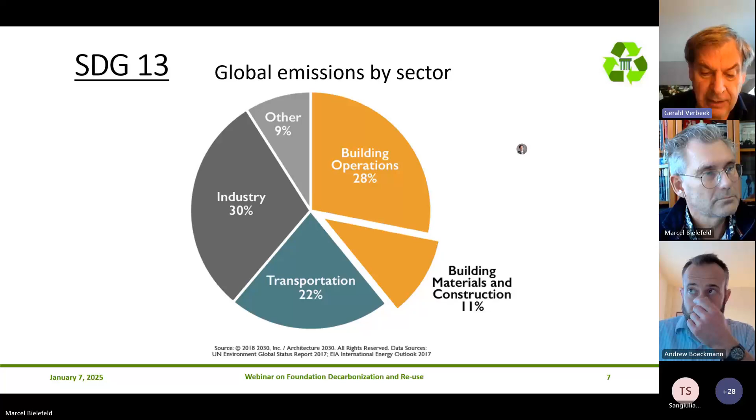When you look at the total global emissions, you see that something like 40% comes out of construction-related aspects. About 10%, a quarter of that, is because of building materials and the construction activity itself, and then an additional about 30% from the operations of the buildings. But what we're putting up is substantial. And more important, when you look at building materials and construction, just three materials—concrete, steel, and aluminum—are responsible for a tremendous amount of global emissions.

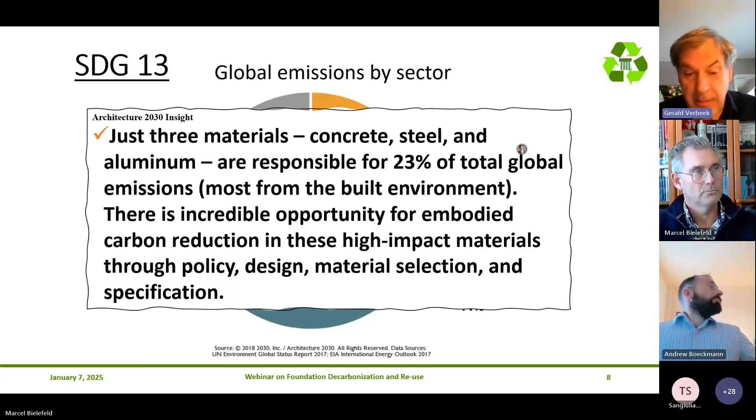Now, we're not using all the steel and all the aluminum for construction-related activities, but those three materials result in about a quarter of the total global emissions, most of them, especially with concrete and steel, from the construction element, the buildings. That means that if we can reduce the amount of steel and concrete that we stick in the ground, we can have a major impact on global emissions.

And that's why you then start looking at the embodied carbon reduction strategy. Many of you will have seen this pyramid before. You can build nothing—obviously, if you don't build anything, there will not be any carbon emissions. At the same time, we have to build something, because population is growing.

We're doing new things, we have to build something, so that first option is really not all that realistic. We do have to minimize waste, as you see at the bottom. If we do that, it's sound practice, but the savings are really not all that much.

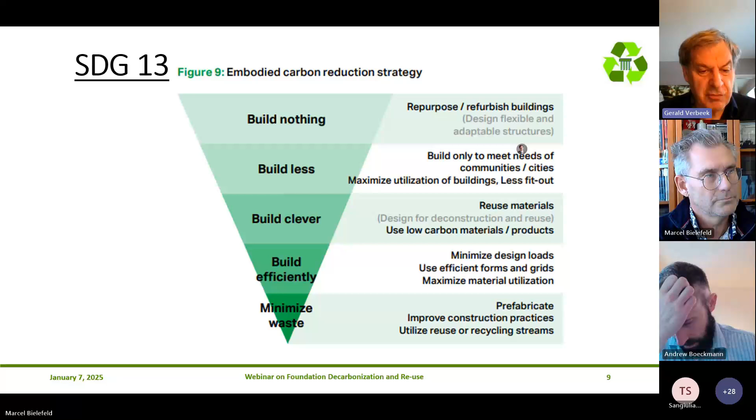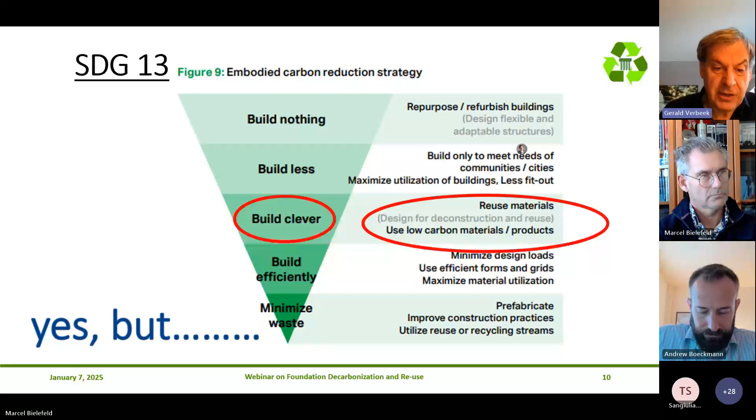Therefore, what we need to do is build clever. And it includes, as you see on the right-hand side of this pyramid, that we have to start reusing materials. Reusing materials means you can recycle it and reuse it again. But more importantly, there's another option: reuse of a foundation. If you have an existing building or structure, a bridge or aqueduct, that no longer fits the requirements, the superstructure can be removed, but you still have that asset in the ground, and that asset is worth something.

Now the problem is that the stakeholders have to be aligned in that way, and the owner would like to hear the opinion of the different stakeholders. The geotechnical engineer, for him or her, reuse of foundation may not be all that interesting because they don't know what kind of material is in the ground, or the condition of the foundation. They have not designed the foundation, and yet they have to assume the risk that the existing foundation can meet the new requirements. So the geotechnical engineer is not all that happy about it.

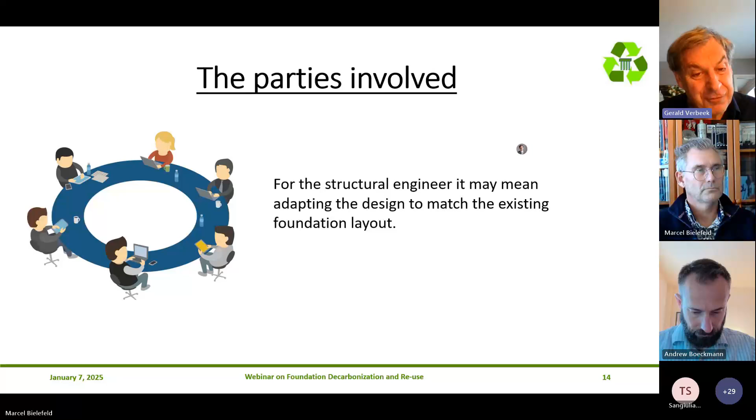Similarly, the structural engineer, because if you have an existing foundation, it means you have to design the new superstructure to match that existing foundation layout. Yes, you can supplement that existing foundation, but it still has an impact on your new superstructure. And therefore it limits the options that the structural engineer has.

Same thing with an architect. Suddenly, all his visions on how to design a building, how a building should look, are no longer all there, because you have to fit that layout of that existing foundation. And it means they're not necessarily all that enthusiastic about it.

And that basically means the owner has to deal with a couple of things. First of all, you have to put in an additional investment to analyze the existing foundation. That's an investment up front. There may be a tremendous payoff at the end. But you also have to deal with a project team that is not all that wild about a decision to use that existing foundation. And for the regulatory body that has to approve this new structure, there's another problem.

Andy will, if not in his presentation then during the Q&A, talk a little bit about it—that there haven't been that many examples yet, so the regulatory body cannot lean on existing guidelines, regulations, or other case studies to say, yeah, let's do this. So once again, you have some reluctance to go ahead with it.

And that's the same thing with the insurance company. The insurance company has to cover a superstructure on an existing foundation, something that hasn't been done all that often. What is the consequence? Is the risk higher? And therefore, in the end, when they vote on this proposal, you're going to get all negative votes. And the consequence is that by voting negative, we leave that asset in the ground.

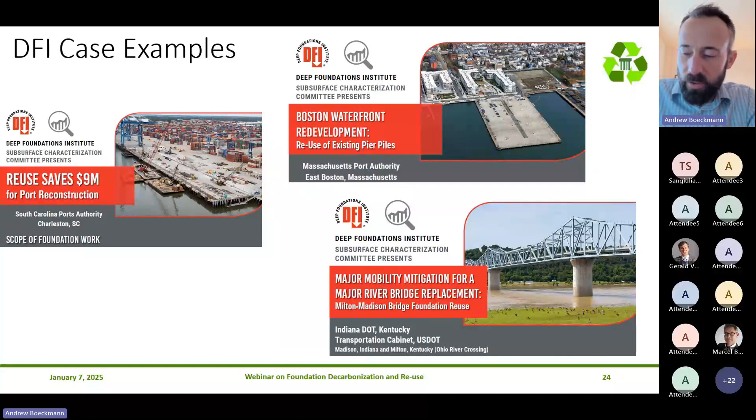I mentioned outreach. This is some of the case examples published on the DFI website that I linked to. We've got 6 of these published so far, and we're still working on more. These are 2-page documents that give high-level project summaries and highlight some of the real tangible advantages of reusing foundations in terms of cost and schedule savings, which can be, especially for these big examples shown here, really significant cost and time savings associated with reuse.

The survey I alluded to was part of the Transportation Research Board's - one prong of that organization in the States is the NCHRP, the National Cooperative Highway Research Program. They do these syntheses every year where they pick, I think it's gone up from 20, a pretty good number of topics to study spanning anything related to transportation, so foundations get represented in that, if not every year, every few years. And one topic that came up back in 2015 was foundation reuse.

That was selected for study. So this is actually how I first got involved in reuse - by performing that synthesis, where we surveyed all 50 transportation agencies, and I think we talked to the Canadian ministries as well. So I'm going to show some highlight results.

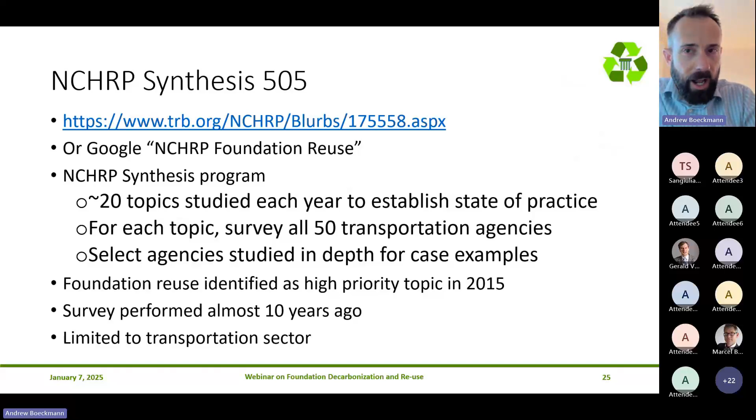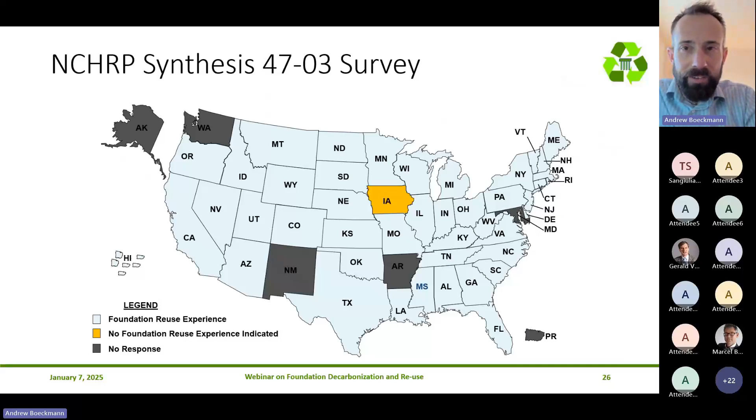Of the 50 states, we had a really good response rate. I think all but 5 or so agencies responded, and all of the ones that responded, with the exception of Iowa, had experience with foundation reuse. I think Iowa probably does have experience now, if they didn't then. So it's very widespread for agencies to reuse foundations, but the experience varied widely, both in terms of the applications for reuse and how commonly they were doing it.

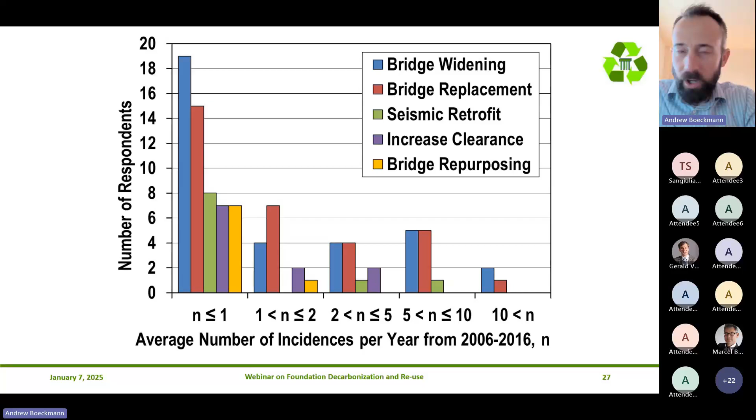So those were the agencies that we tried to gather more information from. We selected them as case example agencies that we talked to more, spent some more time interviewing and really diving into their reuse practices.

Some of the interesting findings from the case examples: one of the agencies, Massachusetts, has a big proportion of their infrastructure in urban areas, so they deal with ground congestion a lot. It's also a relatively old state, so the ground has been developed several times. A lot of the great experience in foundation reuse also comes out of London, where they're on many cycles of reusing the same spaces. So ground congestion tends to be one of the real drivers for foundation reuse.

Similarly, environmental constraints, a lot of the NEPA stuff, can really force the hand toward reuse. So in addition to cost and schedule benefits, honestly, a lot of the time that we're reusing foundations, it's because we really don't have any other choice. That's fine, that goes more to the feasibility thing.

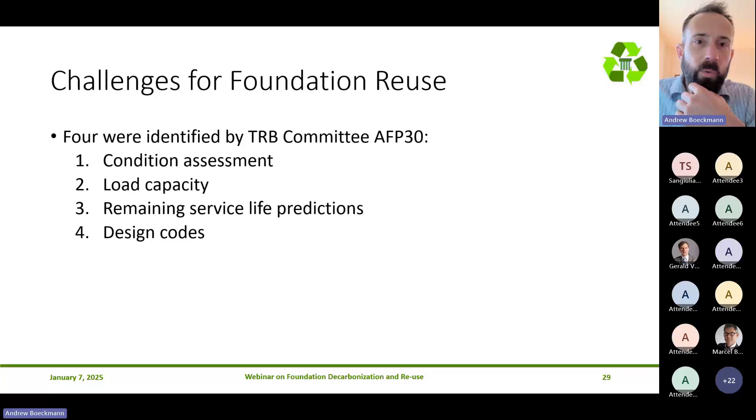But we've also got to think about condition assessment. Load capacity maybe isn't super different from a new foundation, but condition assessment is kind of the new thing - what kind of shape is the foundation in? And hand in hand with that is how much more service life can we get out of the foundation. The design codes can be kind of tricky if it was designed for loading and using methods that aren't used anymore. How do we translate that to more modern design codes?

We've also got Gerald's nice run-through of the different players, which gets into the risk component. As Gerald mentioned, foundation reuse is kind of perceived as more risky than new foundations, and I agree with Gerald, that's not necessarily correct. Maybe it's more risky in some circumstances, but in a lot of circumstances it's probably less risky.

I think what's really true is that the risk is different. With a new foundation, there's a lot of risk that it won't be installed properly, whereas with an existing foundation maybe there are risks associated with condition, although I think in a lot of cases those risks are overstated. The other thing that's really different is the allocation of risk.

We've got kind of a system, at least in the States, for how we allocate risk of foundations. When we start talking about reusing foundations, I think that can upset the apple cart in terms of how risks get allocated among the different players that Gerald went through.

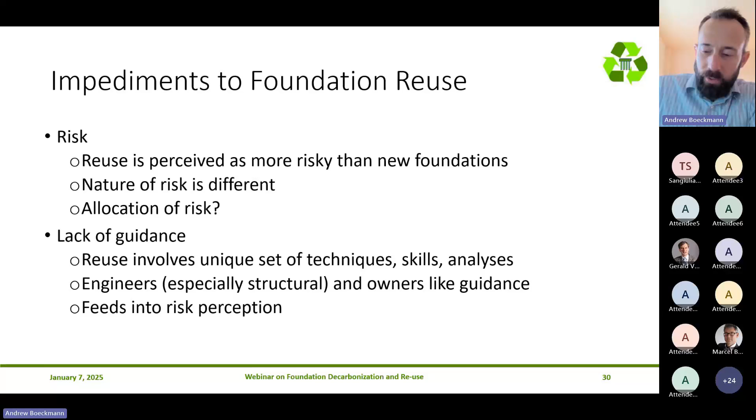And then there's the lack of guidance, which our DFI committee is attempting to resolve. That tends to be a big impediment. It just doesn't give many, especially structural engineers and a lot of geotechs too, the guidance documents we like to follow, for obvious reasons. Not just because it gives us standardization, but it also makes people feel better. So that feeds into that perception of risk.

So, like I mentioned, most of these agencies do not have any kind of formal policy. A handful did, but once you dive into the policies that exist, they're not the kind of big guidance documents that people are really looking for - and this isn't meant to be critical.

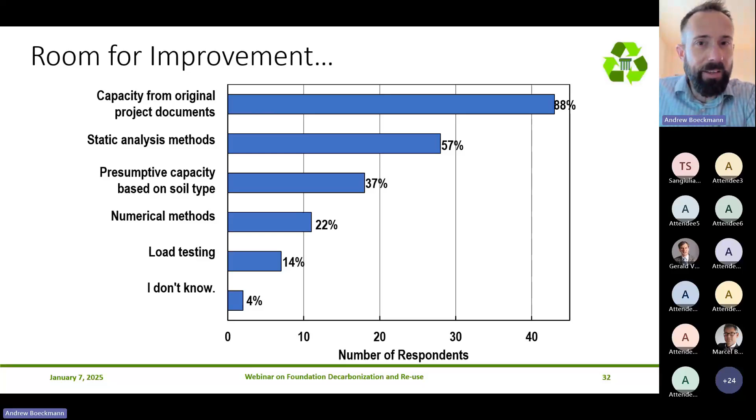There's also room for improvement in how we're actually approaching reuse technically. By far the most common technique for assessing capacity of the existing foundation was just to use the capacity from original project documents, which tends to be very conservative, as I'll show from a few brief slides here on some research that we did for the Missouri DOT.

This came a few years after the survey project. For this MoDOT research project, we did a really comprehensive field study of a couple of bridges that had been in service for 60, 70 years.

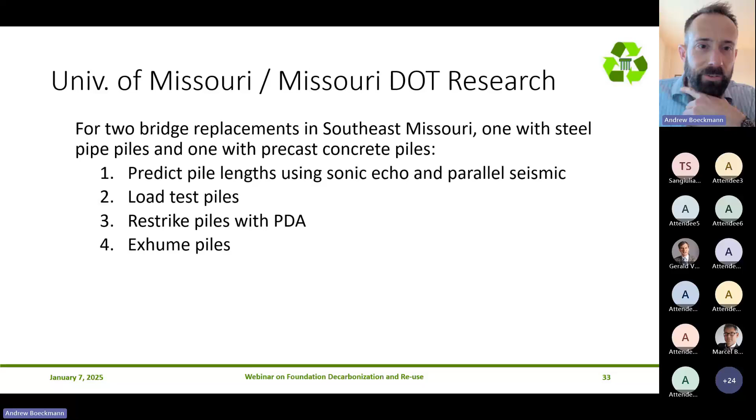Did geophysical methods. We actually did static load tests of the existing piles using the bridge as a reaction. We restruck the piles and did dynamic analysis, high strain dynamic. And then we exhumed the piles and got to look at them.

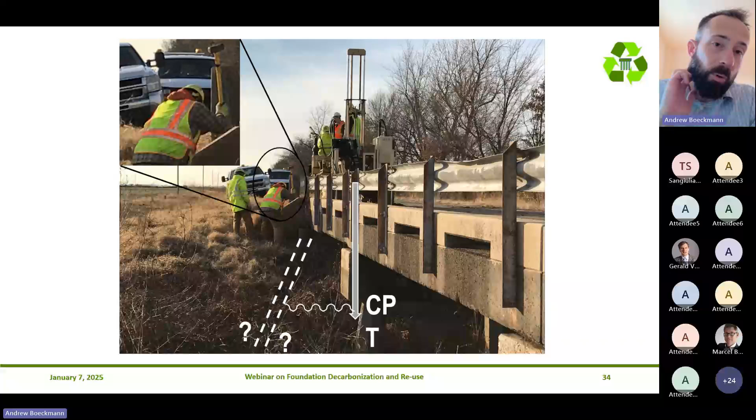Here's the parallel seismic test. I won't get into the details, but a really effective way to characterize the length of an existing foundation is this parallel seismic approach, which can be done with either a boring or a CPT rig, like we did here.

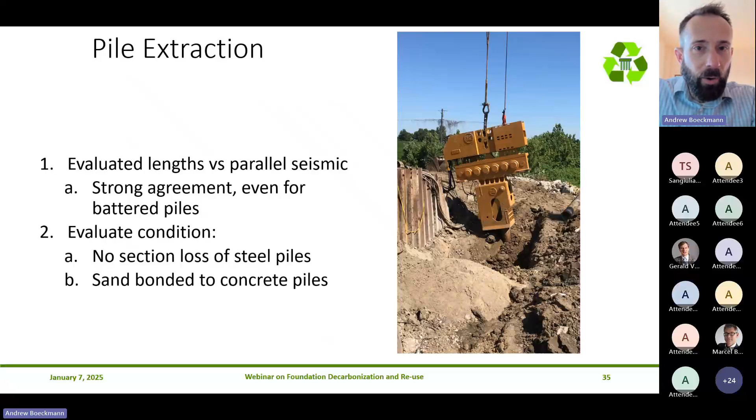We extracted the piles with the vibratory extractor there. Found that the piles were in great shape. Also confirmed the parallel seismic results.

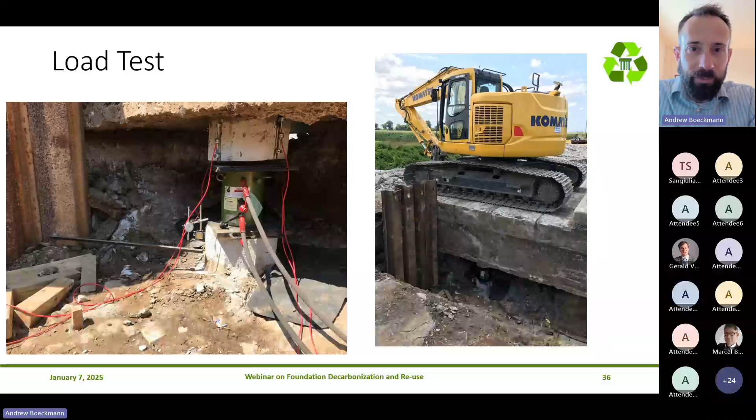Did these static load tests. We had the equipment parked on the top of the bridge to get us as much reaction force as we could get. And even with all that reaction force, we still couldn't fail at least one of the piles. The other one, I think we were getting there.

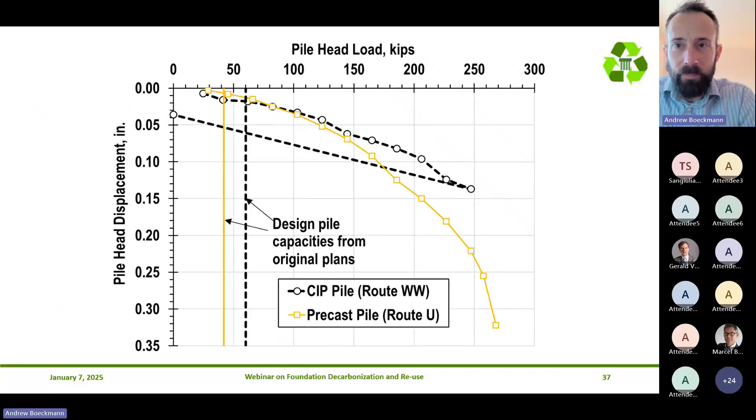We're going to do the same kind of research for the Indiana DOT. I won't get into the details, but basically going to try to repeat that and do some reliability studies.

So real quick summary here. Frequency of reuse is difficult to track, but I think it's probably more common than we think. We're trying to resolve that.

With our case examples for the DFI, where we can highlight some of these examples. But I think there's a lot of good ones, especially out there in the private sector, that we don't even know about. It is a topic that's getting more attention thanks to the efforts of Gerald, especially.

Risk perception is a big impediment, and our DFI committee is working on developing guidance. So I'm gonna say the future is bright, and I think we're ready to hand it over to Tony.

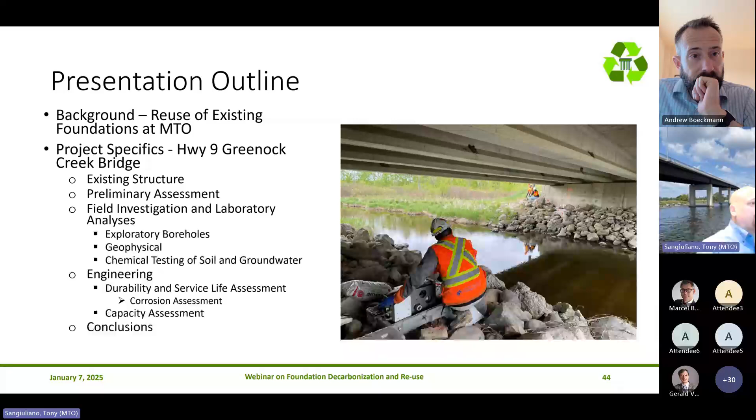I'm a firm believer that if you stick to a process, the outcome will take care of itself. But I'm going to give you just a little bit of background in terms of our inventory, our infrastructure. That's what the next slide is all about.

We have over 3,000 bridges, over 17,000 kilometers of highways, about 5,000 plus or minus structural culverts, defined as culverts with spans greater than 3 meters. We've got a total asset value of about 100 billion, and we transport about $3 billion of goods and services on our highway system daily. So a little bit of background in terms of the Ministry of Transportation of Ontario.

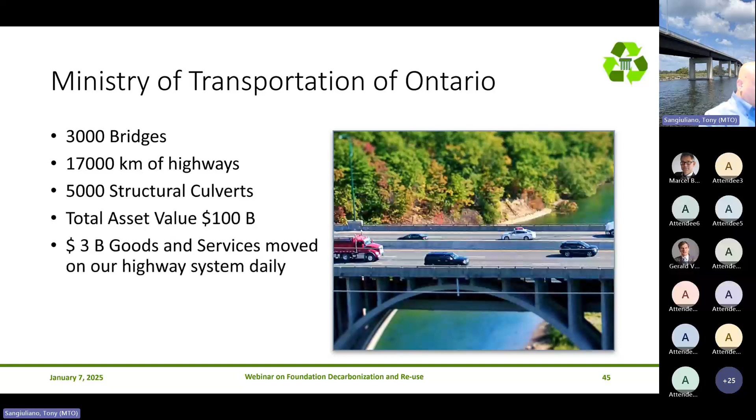When it comes to the reuse of existing foundations, before I share the content of this slide, I'm a big sports enthusiast. That includes hockey, baseball, and football. Starting with football, one of my role models was Vince Lombardi.

And he had several quotes. But one of his quotes was, winning isn't everything, wanting to win is everything. And what that simply means is, in order for any initiative to succeed, there has to be a will.

I'm very proud that I've been able to encourage senior management at the Ministry of Transportation to make an investment in this initiative, and I think we're well on our way. This case study is one example. The other...

And we are certainly committed at the MTO because of the several tangible benefits, whether it's traffic mobility, cost savings, or favorable schedule impacts. There's a lot of benefits, of course, to the reuse of existing foundations, but there needs to be commitment.

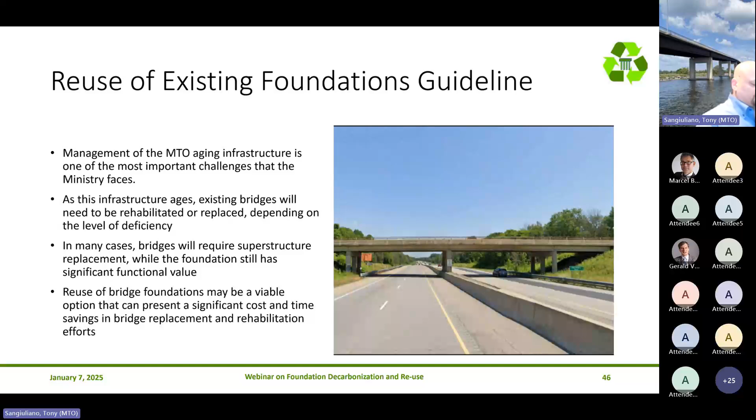And of course, we've got this one case study and more. So I talked about the process. What we are doing is, on every project moving forward where we are considering replacement or rehabilitation, one of the things that we specify is in our terms of reference.

So in commissioning a service provider, a prime service provider, and of course all the functional specialties, including foundations, we actually include requirements in our terms of reference. So it's not like we're leaving this to chance.

We're going to invest in investigation and engineering, make a preliminary assessment, undertake a risk analysis, as indicated on the slide, do an LCC, and of course get into the details if, in fact, when we go through the preliminary assessment, it becomes a winner in terms of, yeah, you know what, the reuse is the preferred option. And then we get into the detailed assessment.

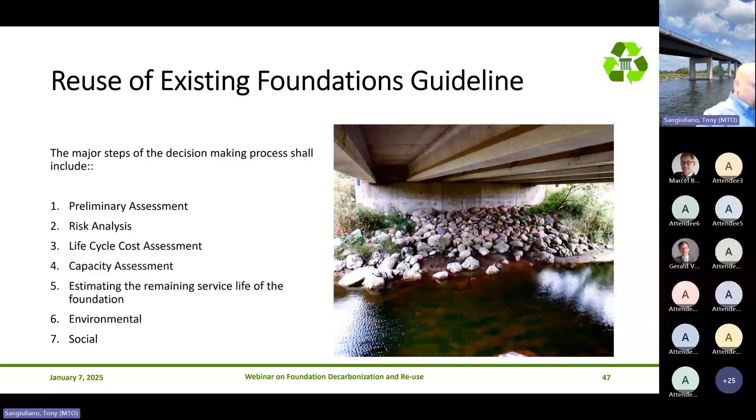But the point that I want to make is that, again, I always say that destiny is not a matter of chance, it's a matter of choice. So we explicitly specify requirements.

The project I'm going to share with you this morning involves an existing bridge structure built in 1971, 18 meters long, single span, carrying Highway 9 over the Greenock Creek, with approach embankments in the order of 3 to 4 meters.

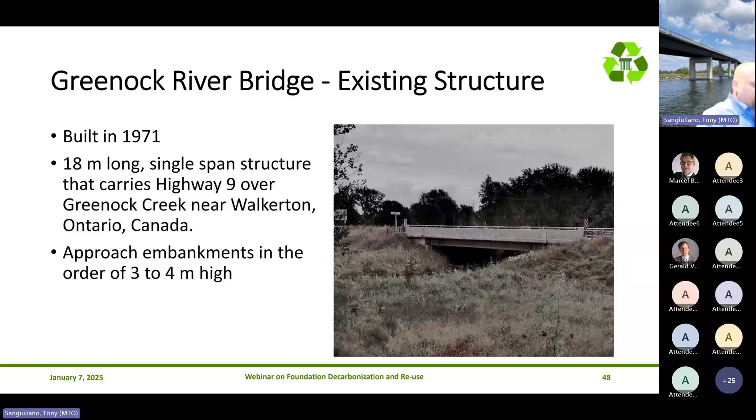There are challenges at times, and we're trying to remedy that with new requirements for new projects: when we install new foundations, to look at any historical drawings or as-built drawings. We did that here, and you'll see that the existing foundations at the two abutments are comprised of 22 steel H piles, HP 310 by 79, approximately 8 meters long, driven into a glacial till deposit. I'll show you the stratigraphy shortly.

We did a little digging into the design loads and were able to ascertain that the piles were designed to support 630 kilonewtons per pile, or 70 tons per pile.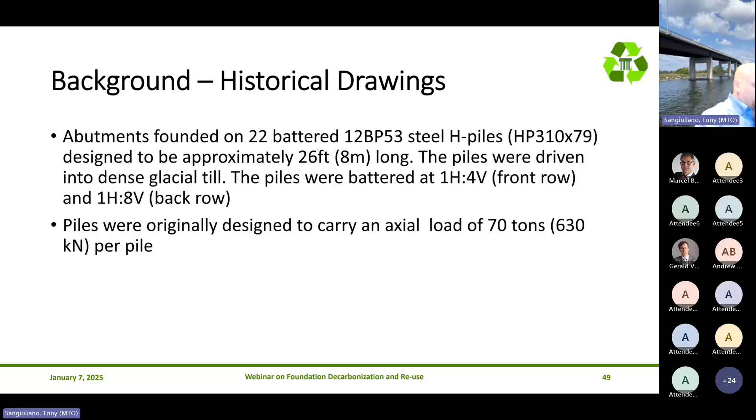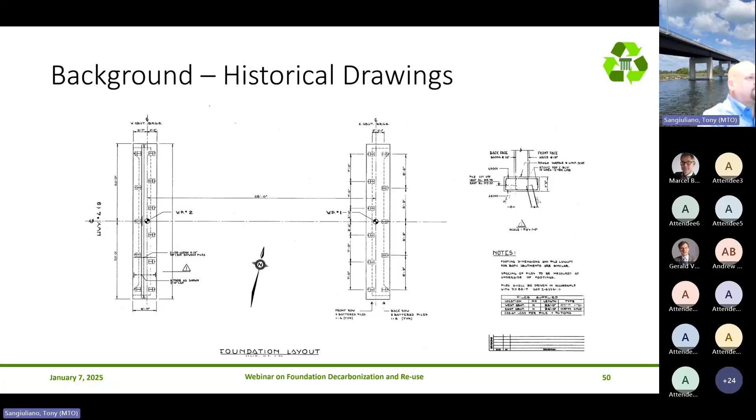Here are the original drawings illustrating the layout of the steel H piles. You can see on plan here for either abutment, with some notes on the side regarding design loads and design capacities. And here is a longitudinal section that again illustrates the existing piles supporting the bridge.

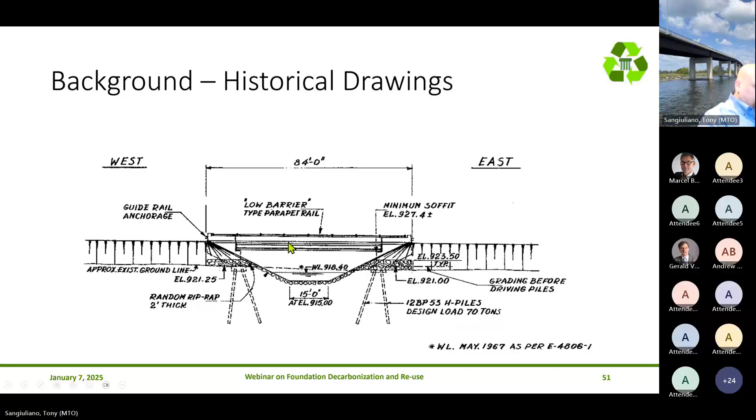So we then proceeded to undertake a preliminary assessment as part of the process. We looked at comparing the reuse alternative with new foundations, including a risk analysis as described by both Gerald and Andy, making an assessment of risk, cost, and traffic mobility. All these things were looked into, and it was concluded that reuse was the preferred option.

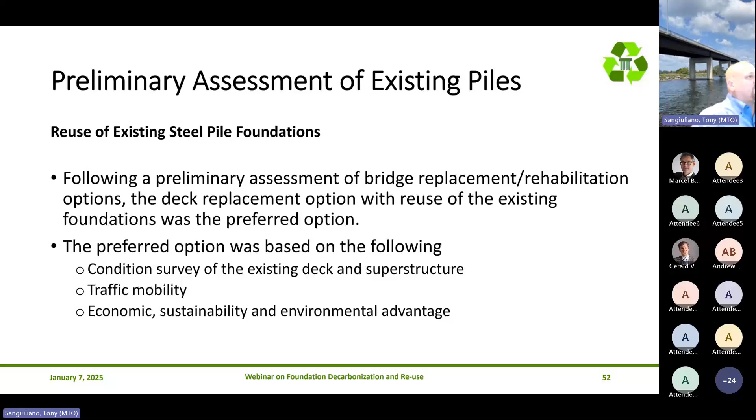With that determination, we then went into the detailed assessment of the existing piles. In the best case scenario, it would be most advantageous to expose the piles if possible. But the conditions at this particular site, with high water levels, cohesionless soils, and requirements for extensive shoring, precluded us from actually exposing the piles.

So what we did instead was take an indirect approach. Similar to what Andy had described, we undertook an in situ investigation to determine what we could do indirectly to assess the condition of the piles.

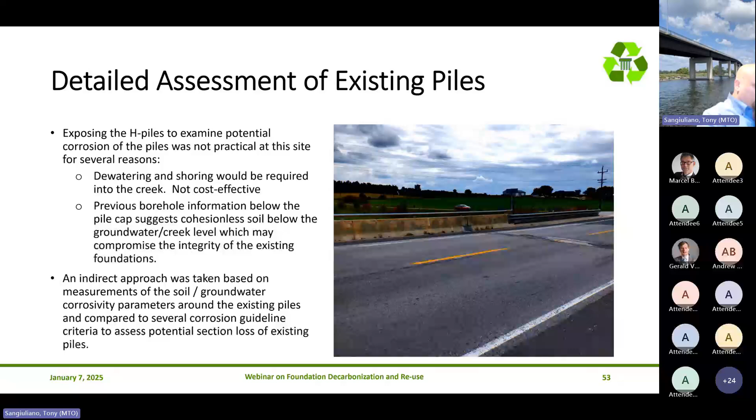We did so with objectives in mind: first, determine the subsurface and groundwater conditions; second, get samples to assess the corrosivity of the soil and groundwater; and third, strategically locate the boreholes as close as we could to where we thought the existing piles were, so we could verify the embedment length using geophysical methods. I'll describe that in the next few slides.

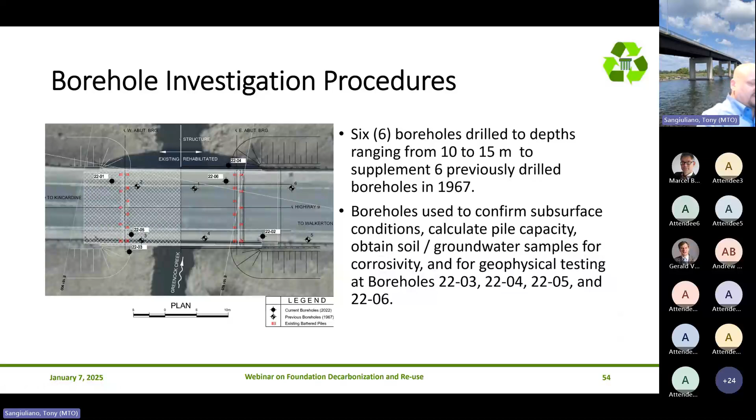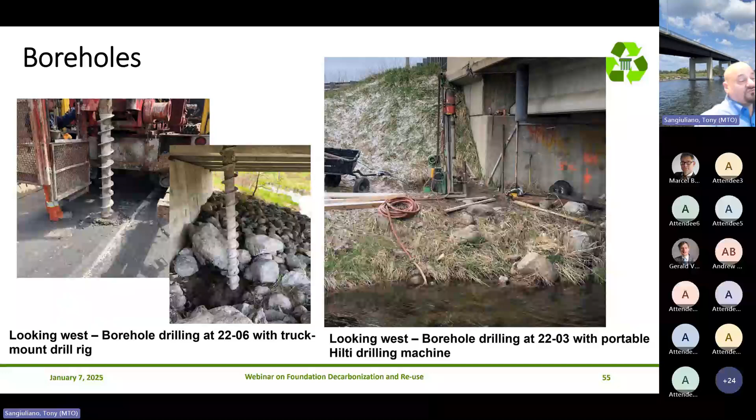Our findings were consistent with what we expected in terms of soil stratigraphy. We've got, as indicated earlier, about 3 to 4 meters of fill, mainly sand and gravel. We had a deposit of native silty clay with some organics, and then predominantly cohesionless soils, with a sand and gravel deposit underlain by a glacial till deposit, a silty sand till.

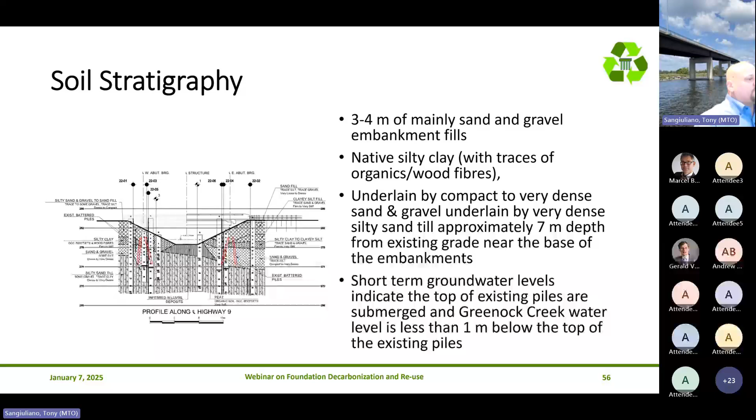But we also, as I indicated, we did some geophysical testing. And what we did is we retained, through our foundation engineer and service provider, that did all this work for us.

Again, like I said, we in our office developed the terms of reference, and then the execution of the work was done by a consultant, Thurber Engineering in this particular case. And what Thurber Engineering did, as per the requirements in the terms of reference, they commissioned a geophysical company who obviously had knowledge and experience in a suite of geophysical methods.

So we tried 4 different types. We tried, and it was successful, the PST, which Andy had indicated he had done at one of his sites. We also did a borehole magnetometer. We had an electromagnetic method and a natural gamma method. So we looked at all 4.

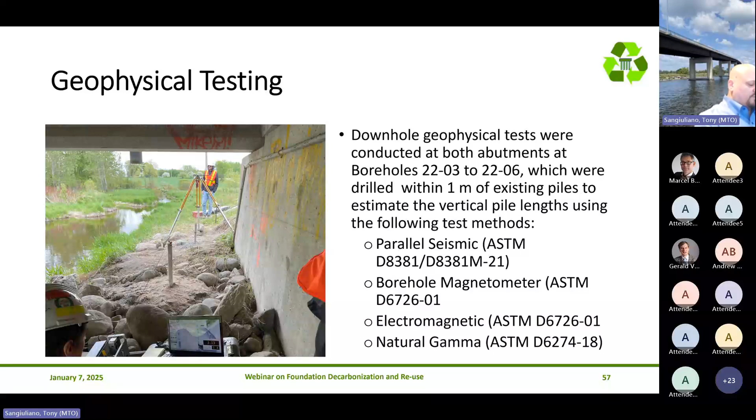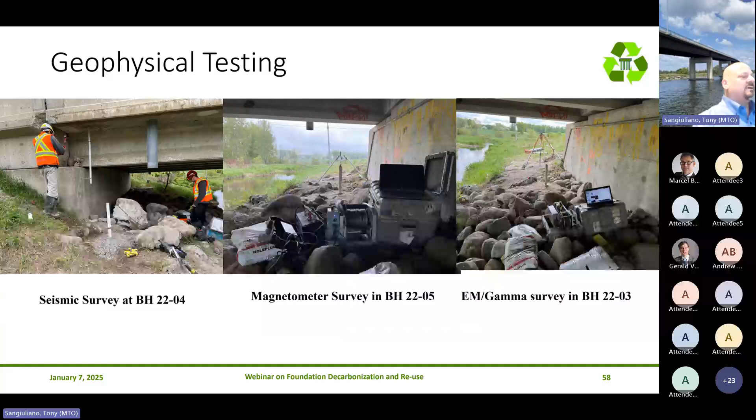So what we concluded was the parallel seismic and the borehole magnetometer were the superior of the methods, and the other 2 methods were not as accurate. So what we're doing on other projects is we're undertaking the same study to see if there's consistency in terms of what methods are better than the others. But for the time being, it's the PST and the borehole magnetometer that seem to be more effective.

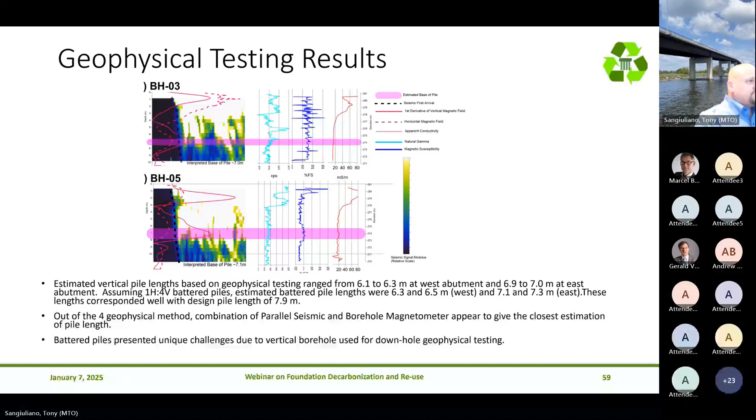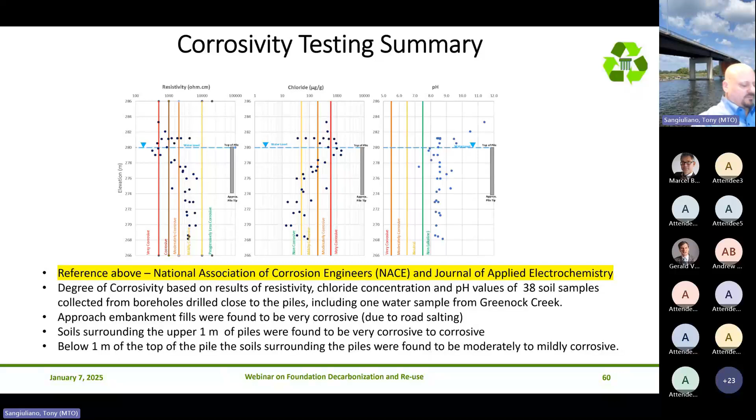But we made a conclusion that below 1 meter of the top of the pile, the soils surrounding the piles were found to be moderately to mildly corrosive. So we made that conclusion. And with that conclusion, which is just repeated here, we went into our assessment.

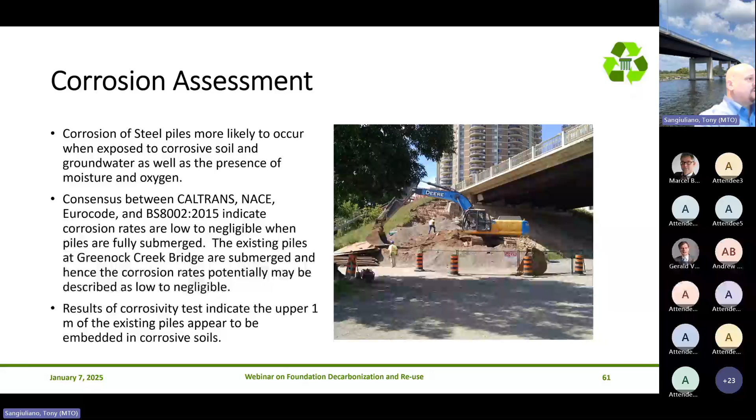And our assessment, looking at different - if I go back up to here, the second one - we looked at different codes and publications like Caltrans, NACE, Eurocode, etc. And we looked at different corrosion rates. And we concluded that we were going to use 0.015 millimeters per year to estimate our section loss. So with that, we were able to compute the pile corrosion loss of the existing piles.

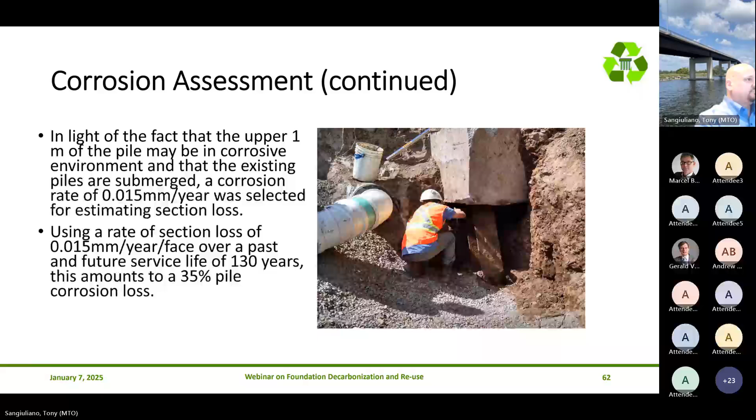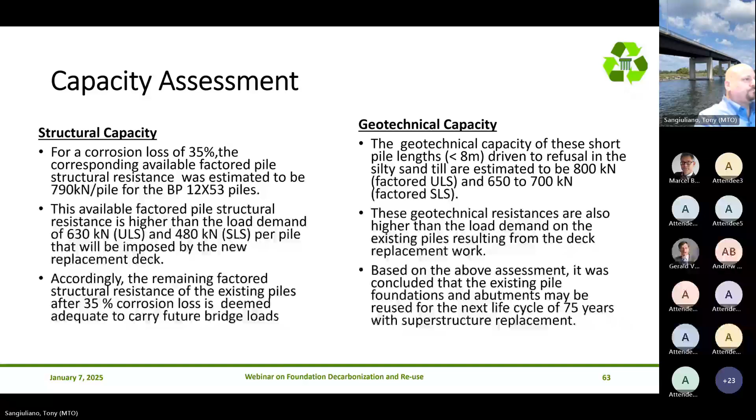So now, conclusions. This study presents an indirect methodology for studying the impact of corrosion. An indirect assessment of the degree of corrosion was made to determine whether the existing foundations can be extended by a further 75 years, and we were able to conclude that we were okay. Obviously the indirect approach was the product of the fact that we could not invoke a direct approach.

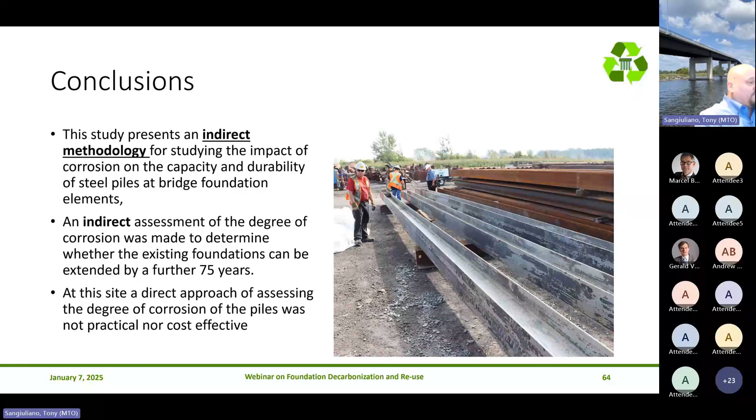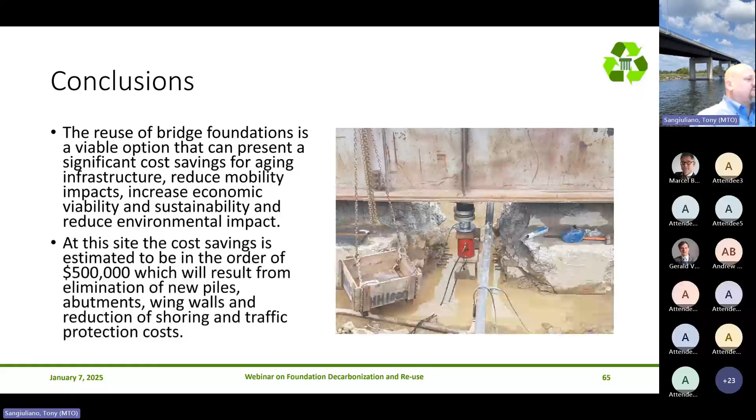The reuse of bridge foundations is a viable option that can present significant cost savings for aging infrastructure. We've talked about this, Gerald's talked about this, Andy's talked about it. All of us are aware there are a lot of benefits. The one specific benefit here is that by reusing the existing foundations, we were able to save $500,000.

The MTO plans to complete a similar assessment for other bridge sites. I'm pleased to reveal that on a couple of sites related to a rapid bridge replacement, we were able to actually get access to the piles. So we did some shoring, some excavation, and some ultrasonic thickness testing. We took some samples and did a very comprehensive study. So we are doing a direct approach wherever we can.

And what we're doing as well, as Andy indicated, we've got at least 3 sites where we've gone to the site where we're replacing a bridge, say an existing 4-span with a 2-span, with some obsolete foundations. We went to those obsolete foundations and did the suite of testing that Andy indicated, in terms of in situ axial compressive

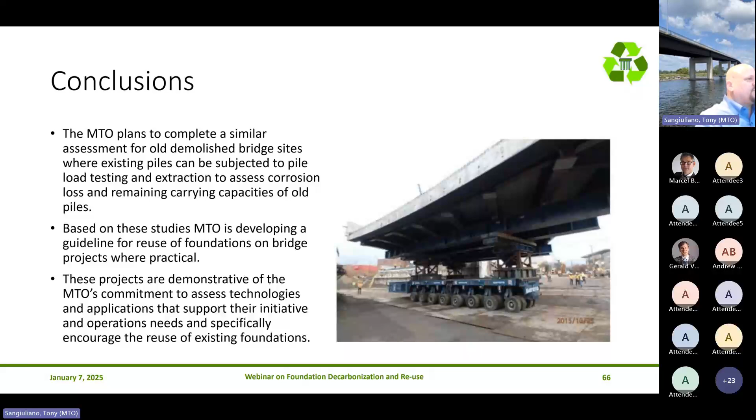lateral testing, taking samples of the soil, extracting, and doing some corrosion assessment. So we're developing a database with different soil conditions, assessing the aggressivity, and looking at the type of piles, so that it gives us more confidence moving forward, so that we could continue to consider on all our jobs the reuse of existing foundations.

And I'll conclude with one last saying. I am renowned for slogans and sayings. Actually, two things. I always say, one, the road to success is always under construction. So we're building. And I know there was a slide that Andy had, and I'm going to ask a question, and I think the slide will come to mind. The question is, what's the largest room in the world? Well, everyone scratches their heads thinking about what possibly could be the largest room in the world.

And I always say that the largest room in the world, consistent with one of Andy's slides, is the room for improvement. So the Ministry of Transportation, we have our strategic directions, our priorities, and one of those priorities is to upgrade the technical standard and improve the state of practice. I think we're well on our way, and we look forward to gaining more knowledge and experience interacting with folks internationally, so that we could be more knowledgeable and make better informed decisions. Thank you, that concludes my presentation.